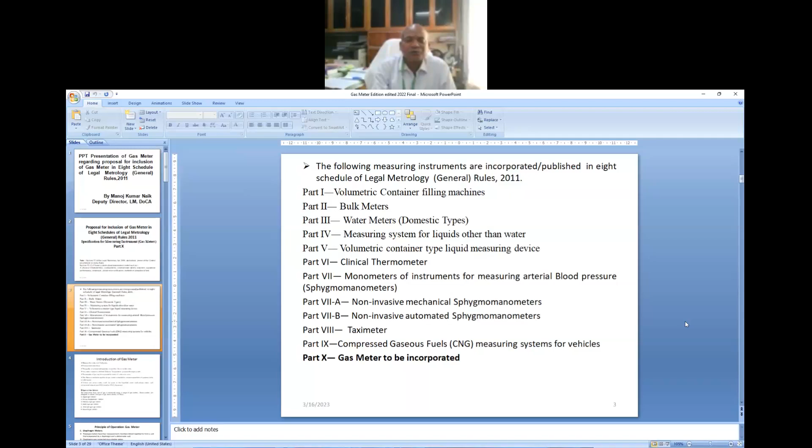It is proposed on the basis of OIML recommendation number R137, part 1 and part 2, edition 2012, and this is the proposed draft rules for the gas meter.

A gas meter is an instrument intended to measure, memorize, and display the quantity of gas passing the flow sensor. For propane and natural gas, it measures the quantity or pressurized quantity of gas that flows via the meter. Gas meters measure a defined volume at certain temperature and pressure through the meter. The quantity of gas can be expressed in units of volume or mass.

This recommendation applies to gas meters intended to measure quantities of gaseous fuels or other gases. It does not cover meters used for gas in the liquefied state, multi-phase, steam, and compressed natural gas used in CNG dispensers.

Various types of gas meters measure the volumetric flow rate of gas using a range of gas meters, including diaphragm meters, rotary displacement meters, velocity type gas meters, head type gas meters, thermal type gas meters, and acoustic gas meters. I think some of the paper presenters are from manufacturing units, and as I understand, they will elaborate on the diaphragm meter.

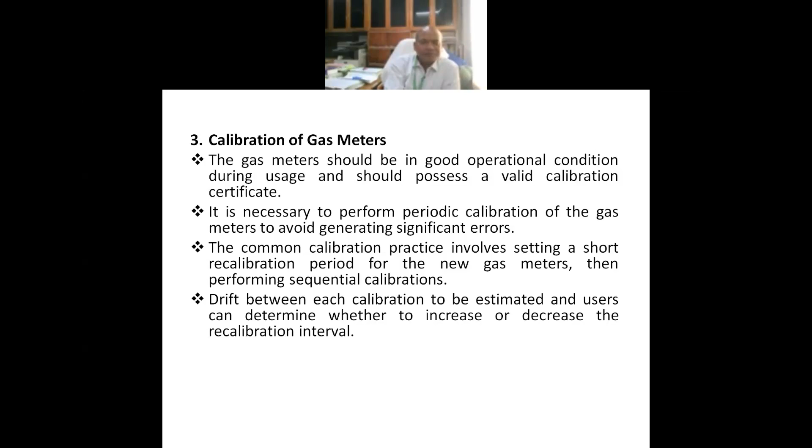Uses of gas meters: they are used in offshore and onshore drilling rigs to measure gas quantities. They can be retrofitted to existing rig flare lines to measure gas volumes. Gas meters are no exception; they must be in good operational condition and must have a valid calibration certificate. They are also used in residential, commercial, and industrial buildings that consume fuel gas supplied by a gas utility.

International practice with gas meters: the initial re-verification period for diaphragm type is 7 years proposed. For meters rated air capacity greater than 240 cubic feet per hour, that is 6.8 meter cube per hour, the initial verification period is proposed at 7 years, and the subsequent re-verification period was 6 years in international practice. After 2014, the subsequent re-verification period is reduced to 5 years.

Meters rated with air capacity less than 240 cubic feet per hour, that is 6.8 meter cube per hour, qualifying under the clause was 10 years, and initial verification was 7 years, but after 2013 it is made 6 years, and subsequent verification it is made 8 years.

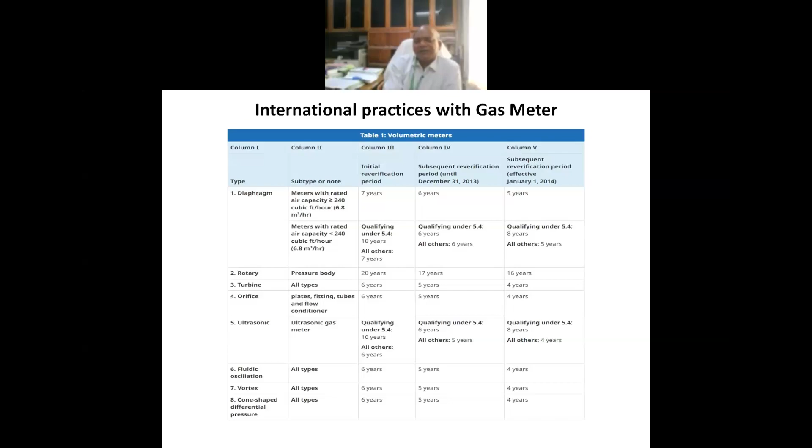Rotary type gas meters, subtype or note pressure body type, have an initial verification period of 20 years, and after 2013 it was made 17 years, and after 2014 it was made 16 years. Similarly, rotary, turbine, orifice, ultrasonic, fluidic oscillation, and vortex meters have almost all come after 2014, and the periodic re-verification period is made almost 4 years. I will show later the gas meter which was approved by the Ministry of Consumer Affairs on the basis of international recommendation only, not tested inside the country.

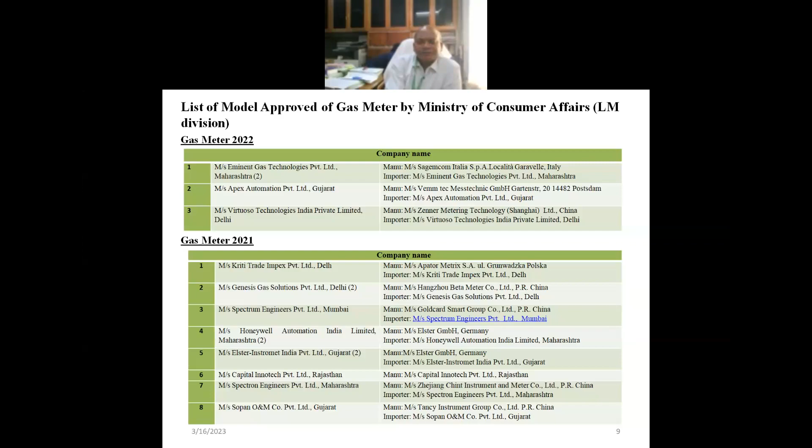In the provisions relating to approval of model in accordance with the Legal Metrology Act, under Section 22, every person before manufacturing or importing any weight or measure shall seek the approval of models of such weight or measure in such manner, on payment of such fees and from such authority as may be prescribed. Such approval of model may not be required in respect of any cast iron, brass, bullion, or carat weight or any beam scale, length measure not being a measuring tape, which are ordinarily used in retail trade for measuring textile or timber, or capacity measure not exceeding 20 liters, ordinarily used in retail trade for measuring kerosene, milk, or potable liquors. Provided further that the prescribed authority may, if satisfied that the model of any weight or measure which has been approved in a country outside India conforms to the standards established under this act, approve such model without any test or after such test as he may deem fit. This is the act under Section 22. The director is empowered for model approval.

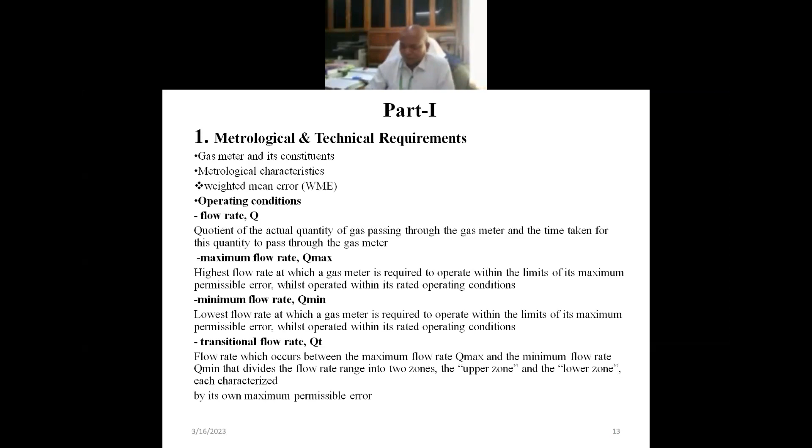In the technical specification, we have two parts. Part 1 deals with the metrological and technical requirements, and Part 2 deals with the metrological controls and performance test.

Some technical terms: flow rate is the actual quantity of gas passing through the gas meter and the time taken for that quantity to pass through the gas meter. This is flow rate Q.

Maximum flow rate, Q max, is the highest flow rate, and minimum flow rate, Q min, is the lowest. Transitional flow rate, denoted QT, is the flow rate that occurs between Q max and Q min, dividing the flow rate range into two zones, the upper zone and the lower zone, each characterized by its own maximum permissible error. So the upper zone has its own maximum permissible error, and the lower zone also has its own maximum permissible error.

Test conditions and metrological requirements include rated operating conditions and values of Q max, QT and Q min. The manufacturer of the gas meter should mention the rated operating conditions. The flow rate characteristics of a gas meter shall be defined by the values of Q max, QT and Q min, and the ratios and relations shall be within the ranges stated in table 1.

When the Q max to Q min ratio is greater than 50, the Q max to QT ratio should be greater than or equal to 10. When the Q max to Q min ratio is greater than 5 and less than 50, the Q max to QT ratio should be greater than or equal to 5.

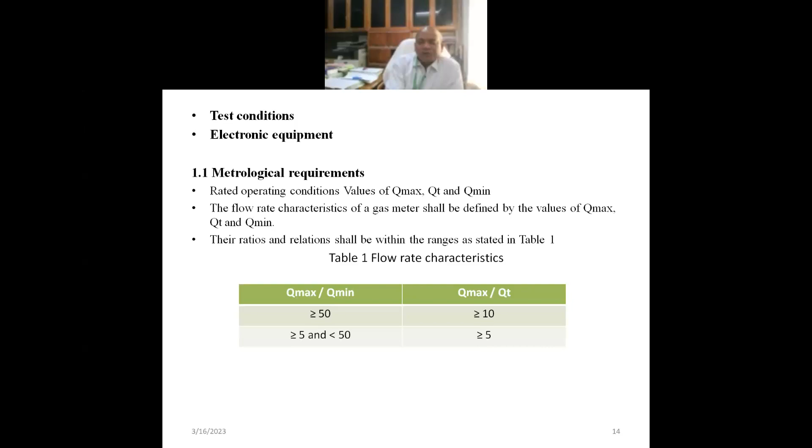Regarding accuracy class and maximum permissible errors, gas meters may be divided into three accuracy classes: 0.5, 1 and 1.5. A gas meter shall be classified according to its accuracy into one of these classes. The value of MPE is dependent on the applicable accuracy class as listed in table 2.

This is based on the flow rate Q. When Q min is less than Q is less than QT, during the type evaluation and initial verification, the maximum permissible error for accuracy class 0.5 is plus minus 1%, for accuracy class 1 it is plus minus 2%, and for accuracy class 1.5 it is plus minus 3%.

And when QT is less than or equal to flow rate Q is less than or equal to Q max, for accuracy class 0.5 the initial maximum permissible error is plus minus 0.5%, for class 1 it is plus minus 1%, and for class 1.5 it is plus minus 1.5%.

During subsequent verification and in-service use, the maximum permissible error for accuracy class 0.5 is plus minus 2%, for accuracy class 1 it is plus minus 4%, and for accuracy class 1.5 it is plus minus 6%. So in the in-service condition, the maximum permissible error is almost double that of the initial verification.

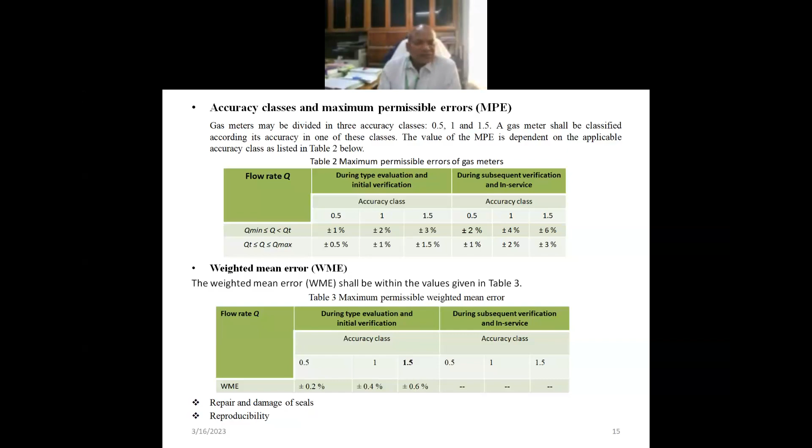Another term is weighted mean error, WME. The weighted mean error shall be within the values per table 3. For flow rate Q and accuracy class 0.5, during evaluation and initial verification, WME should be plus minus 0.2%; for class 1 accuracy it is plus minus 0.4%; and for class 1.5 accuracy it is plus minus 0.6%.

A gas meter shall meet the following requirements after being subjected to flow at a rate between 0.8 Q max and Q max, comprising a quantity equivalent to a flow at Q max during a period of 2000 hours. This is the durability condition.

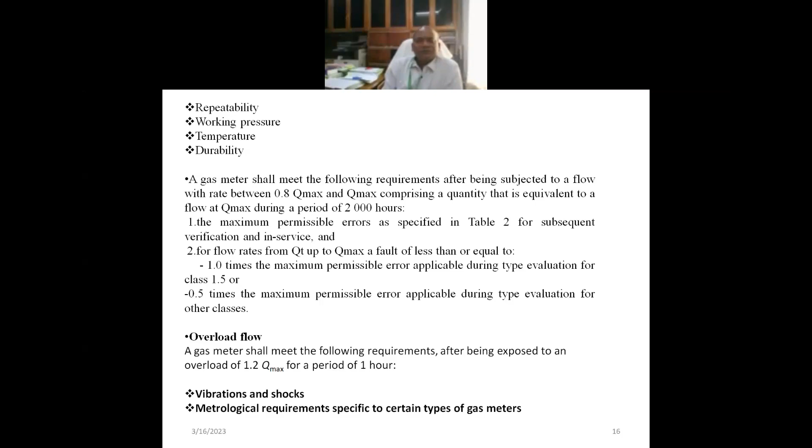For flow rates from QT up to Q max, a fault of less than or equal to 1.0 times the maximum permissible error applicable during type evaluation for class 1.5 or 0.5 is required. Part two of the technical specification covers the metrological controls and performance tests.

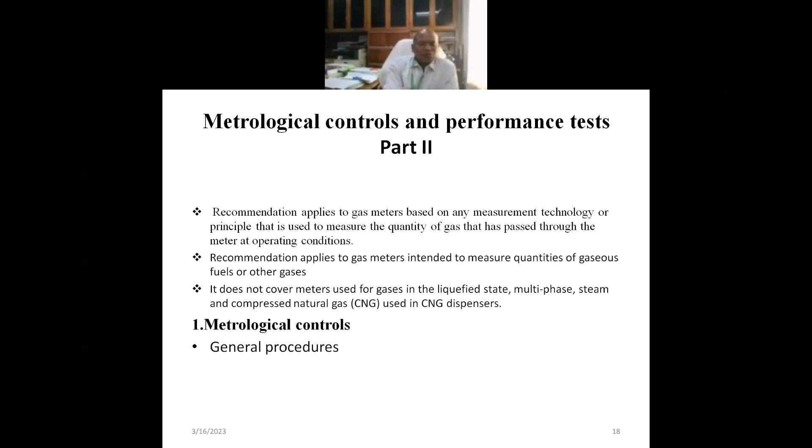This recommendation applies to gas meters based on any measurement technology or principle used to measure the quantity of gas that has passed through the meter at operating conditions. It applies to gas meters intended to measure quantities of gaseous fuels or other gases. It does not cover meters used for gases in the liquefied state, multi-phase, steam, and compressed natural gas used in CNG dispensers. Metrological controls general procedure is detailed elsewhere.

I will not cover all of that; instead I will talk about some of the performance tests, starting with the dry static temperature test.

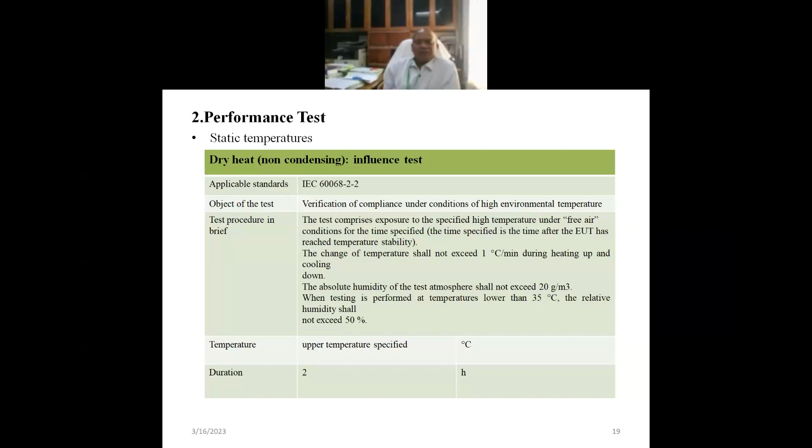The applicable standard is IEC 60068-2-2, and the object of the test is verification of compliance under conditions of high environmental temperature. In brief, the test comprises exposure to the specified high temperature under free air conditions for the time specified, which is the time after the unit under test has reached temperature stability. The change of temperature shall not exceed 1 degree centigrade per minute during heating up and cooling down. The absolute humidity of the test atmosphere shall not exceed 20 grams per cubic meter. When testing is performed at a temperature lower than 35 degrees centigrade, the relative humidity shall not exceed 50%. The temperature upper limit is specified in degrees centigrade, with a duration of 2 hours.

In cold influence test, the applicable standard is IEC 60068-2-1, and the object of test is verification of compliance under conditions of low environmental temperature. The test procedure in brief comprises exposure to the specified low temperature under free air conditions for the time specified, meaning the time after the EUT has reached maximum temperature stability.

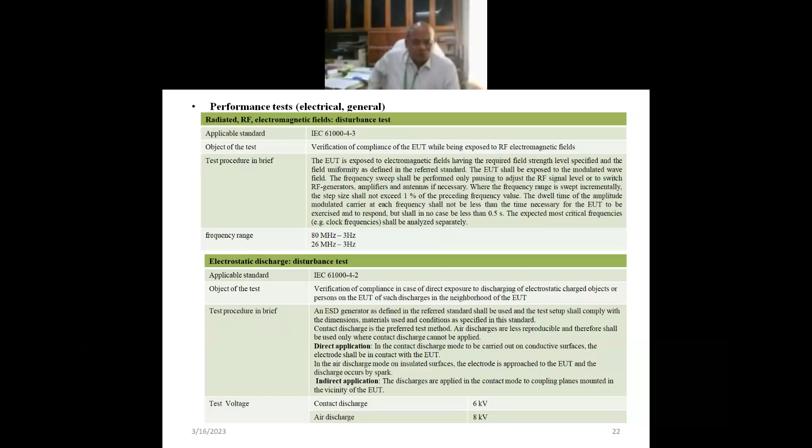For offenses and penalties, Section 25 of the Act specifies the penalty for use of non-standard weight or measure. The first offense is a fine up to 25,000, and for subsequent offense, imprisonment for a term which may extend to 6 months, and also with fine.

Penalty for manufacture or sale of non-standard weight or measure: first offense is a fine up to 25,000, and for second or subsequent offense, imprisonment for a term which may extend to 3 years, or fine, or both.

Penalty for transaction in contravention of standard weight or measure is 10,000 rupees. And penalty for use of unverified weight or measure is not less than 2,000, which may extend to 10,000 rupees. Thank you, sir.

Thank you very much, sir, for your insights into the draft regulations for gas meters in India. You have very clearly explained the provisions relating to the approval of model as per the Legal Metrology Act 2009, Section 22. You have also clearly explained the maximum permissible error requirements and various performance tests for the meters, and also the penalties related to misuse.

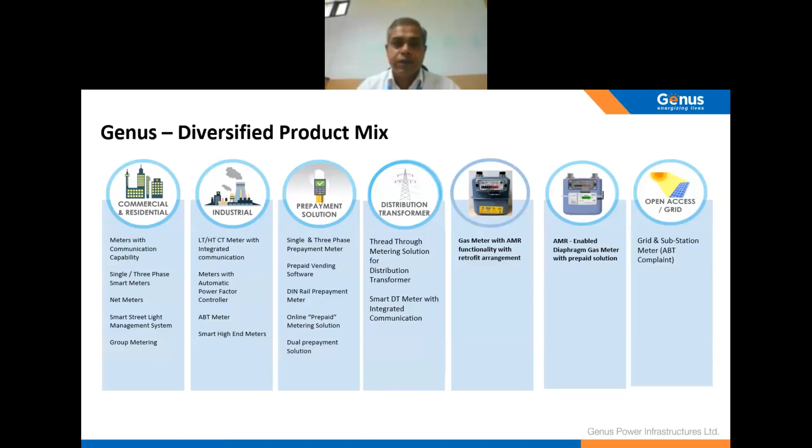We are present in almost 18 countries, mainly African and Middle East countries, including Singapore. We are present in almost all the utilities in India, basically electrical utilities, and currently we are serving most of the gas utilities, the CGDs in India as well, with our domestic meters.

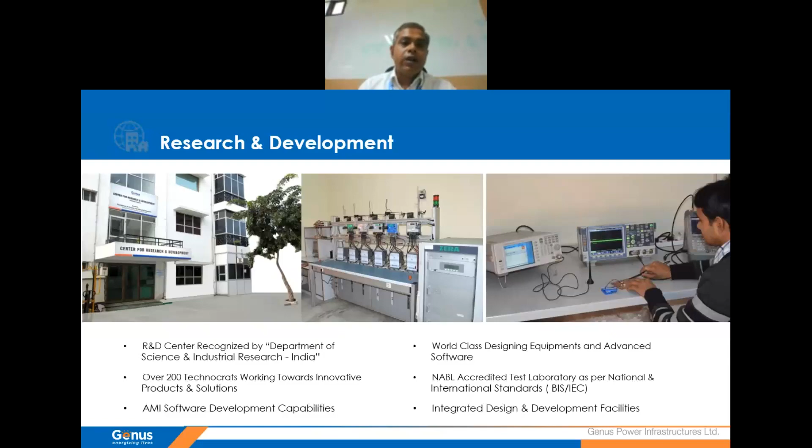The rest basically belongs to our electricity meter manufacturing. This is about our research and development. We have R&D recognized by the Department of Science and Industrial Research of India. Over 200 technocrats are working here. We have a NABL accredited lab that is BIS and IEC certified, along with integrated design and development facilities.

This is our infrastructure facility of fully automated SMT lines, belonging to the electricity meters. It's a fully automated metering line. We manufacture this in various parts of India like Jaipur and Haridwar.

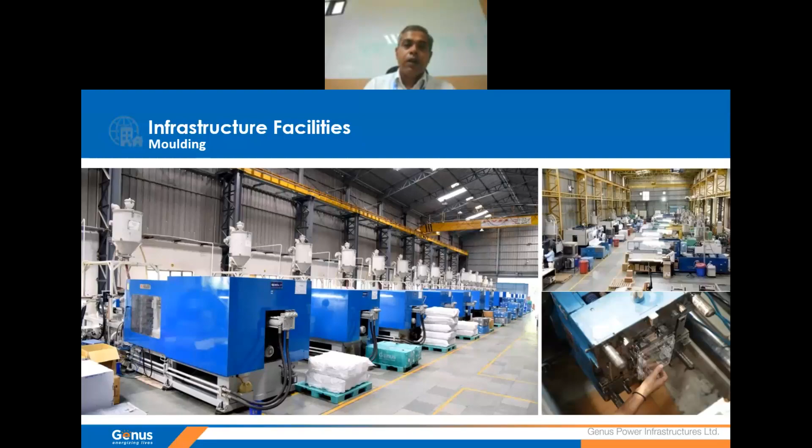We also have our in-house facility for injection molding. So any plastic equipment, mostly we are manufacturing all the plastic equipment of electricity meters and gas meters in-house as well, to ensure the quality of the product for measuring units and all. This is the tool room, where tooling is also done by Genus in-house.

This is about the gas journey so far for Genus. We have the most important certificates as of now in domestic gas meters: MID, Module B, Module D, and BIS certificate. I'll explain later why this is important. We have delivered more than 150K gas meters to various cities in India.

We have also already delivered smart AMR postpaid meters. Production capacity currently is 30,000, and based on the requirement, we can increase anytime. We have our in-house AMR solutions also, that is meter interface unit, MIU. And as I told earlier, prepayment smart meters with dual communication and all is under development, and we will release this by this year end.

One important point I'd like to highlight, since this is a common forum and everybody should know this: we have a strategic tie-up with Itron, or right now Dresser. You all know about Itron, one of the market leaders in gas metering, a company based in the US. Unfortunately, they are discontinuing from India, and that metering section—especially commercial and industrial metering like turbines, RPD, regulators, valves, EVCs—all were acquired by a company called Dresser. This is also a meter manufacturing company, but focused basically on North America, an American company. Now they have acquired the German facility of Itron, and Itron now becomes Dresser.

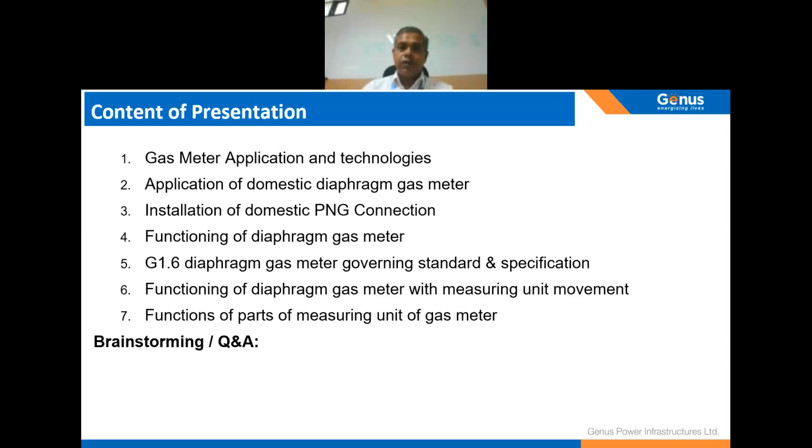So first, what is the purpose of a gas meter? A gas meter is a specialized flow meter used to measure the volume of gases such as natural gas and liquefied petroleum gas. Gas meters are used in residential, commercial, and industrial buildings. Accurate gas meter or liquid flow measurement ensures safe, efficient, and environmentally compliant operation in measured applications.

Gas is basically an inflammable thing, so all gas segments are divided into zones: zone 0, zone 1, and zone 2. Zone 0 is the highly inflammable one, zone 2 is the lowest one, and so on. Meters are normally coming under the zone 2 facility, to ensure that accidents don't happen, so we segregate this into zones.

Now there are many types of gas meters: domestic to cater to the entire market, commercial, industrial, and custody transfer. There are many more types of meters, but today I am focusing on the main meters in the industry that are most in use.

The first section is positive displacement. Under positive displacement, obviously our topic of today, diaphragm meters, comes under this, and rotary meters also come under this. Rotary meters are basically known as RPD meters also, that is rotary positive displacement. We can have a separate presentation on this because it's a different league of meters. So we are focusing on diaphragm meters for today.

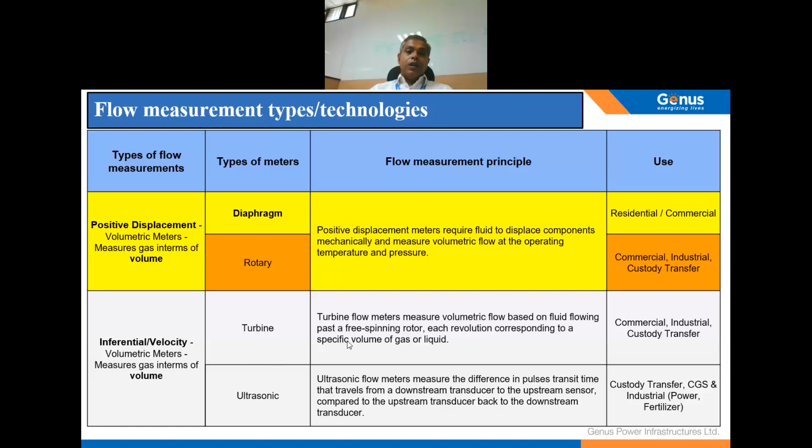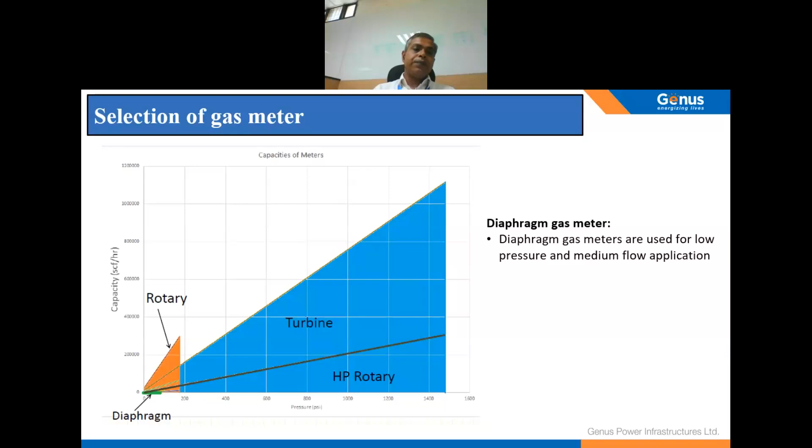One of the main reasons we go with domestic meters, diaphragm meters, for the domestic section or maybe a few commercial sections as well, is because of the rate. Rotary meters are costly, so you cannot afford to have rotary meters in the domestic section because of the ROI issue. So this is one of the important reasons why we go with diaphragm meters for the domestic section.

What is a diaphragm gas meter? I'm focusing on the G1.6 meter, which is the residential meter. A diaphragm gas meter is a positive displacement flow meter used to measure the volume of gas consumption at low pressure, so the utility can bill for it. It's a specialized flow meter that can measure the volume of gases like LPG, low pressure piped natural gas, etc. It can be used for domestic and commercial purposes.

These are the basic certifications required to sell gas meters in India. This is the main guideline to participate in a tender, the main criteria. As of now, the mandatory certificate is EN 1359, the governing standard, and the issuance authority is MID. In MID there are two sections: product and factory. Product MID is known as Module B, and factory related certificate is known as Module D. These are the most important certificates needed to quote any tender or supply meters to the utility.

Test labs - the most important two labs as of now, maybe a few more, but I have listed down two: FCRI Palakkad, Kerala, and Yadav Measurement, Udaipur.

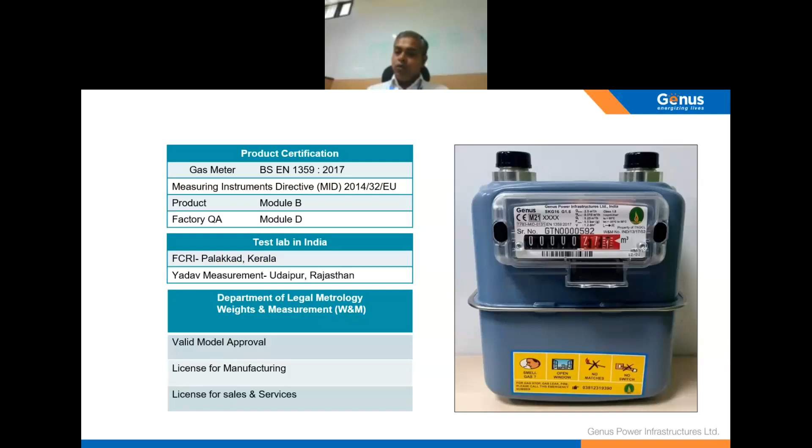For testing of module B and all, one of the major certifications is the durability test. That durability test checks up to a certain number of lakhs of cycles of the meter without stopping it, so that it can check the durability of the meter. This kind of timeframe everybody has to maintain before launching their gas meters in India.

This is the normal structure, just to give an idea of where the meter is placed. Before the oven, the meter is connected with the GI pipeline, and for safety reasons we have an isolation valve and a regulator. That regulator ensures the meter operates within a range of 21 millibar, so to maintain that pressure capacity, a regulator is needed. After that, the gas goes to the meter, and from the meter it directly goes to the appliance, through appliance valves to the oven for kitchen purposes. This gives a greater idea of how the placement of meters happens.

This is about the normal basic parameters of a gas meter. One, of course, is that EN 1359 is the main standard, the European standard, and our BIS 14439 is also there, which is under reformation. I think it already exists, but some reformation is going on.

Now coming to the technical parameters, one of the most important is cyclic volume. As earlier Nayak sir told, there are different types of cyclic volumes. I have mentioned 1.2 liter, 1 liter, 0.8, and 0.6, and given a bold mark on 1.2 — I'll come to why I mentioned that. Cyclic volume is the volume of gas passed by one rotation of the gas meter measuring unit, and is 4 times the volume of the diaphragm.

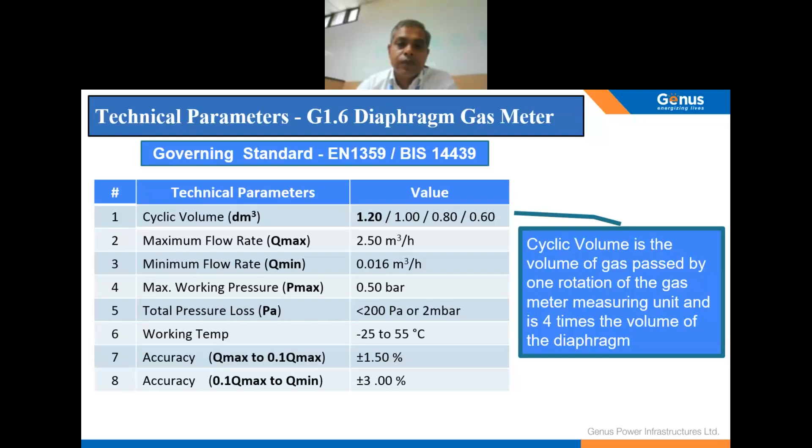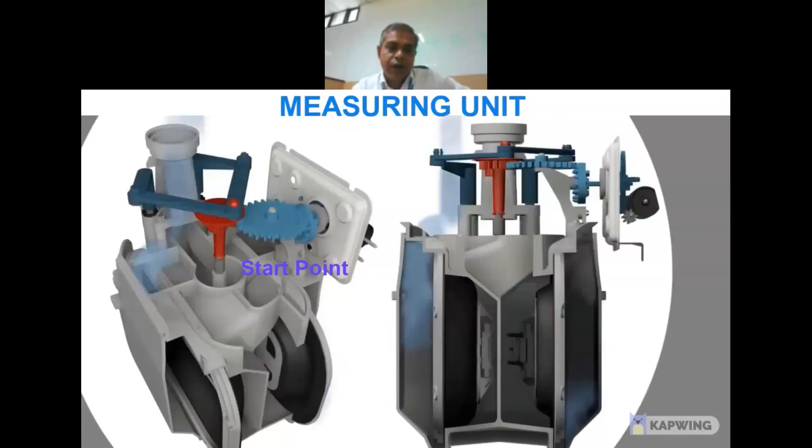So I arranged this video — you can see how the gas is going inside and coming out. This is 1.2 liter rotation, meaning one cycle. I'll play this once more. You can see the gas going from one chamber, expanding the diaphragm, then going to the next level and getting compressed. Once compressed, it goes to the next outlet chamber from inlet to outlet. Again it expands and compresses — that's why it's called four rounds of diaphragm compression and expansion, so that it creates one cyclic volume.

Different manufacturers follow different sizes of cyclic volume — 1.2, 0.6 liter and so on — depending on the structure of the measuring unit. The less the cyclic volume is, the smaller the measurement counter size gets, because the diaphragm size also gets smaller. You can see once more, it's going from inside, then that side, coming out, rotating, and the gears and crankshafts are rotating accordingly, creating that one unit.

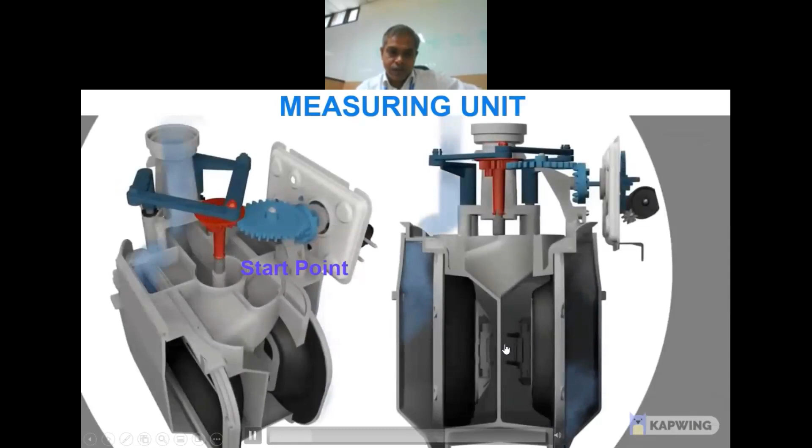So here we've done a small exercise to understand cyclic volume better. We've given four types of cyclic volume in liters: 1.2, 1, 0.8, and 0.6. If we pass 10 liters of gas or air, to measure this 10 liters, a 1.2 liter cyclic volume will get 8.33 rotations, whereas for 1 liter it's 10, for 0.8 it's 12.5, and for 0.6 it's 16.67.

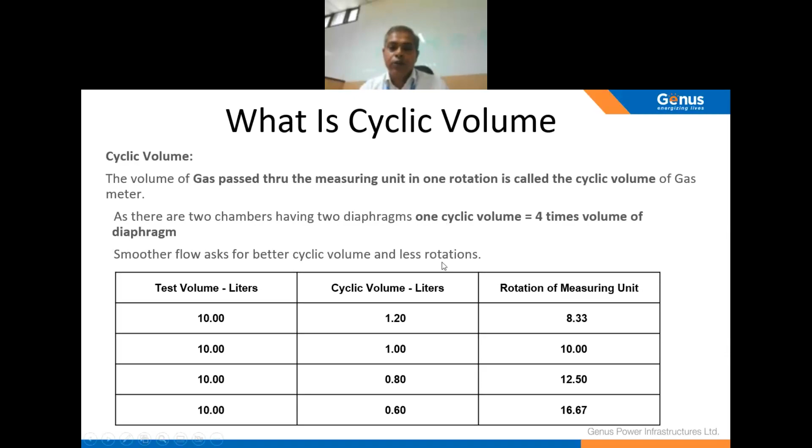So you can derive from here that the more liters the cyclic volume is, the less the rotation is — meaning wear and tear will be less for any meter. You can get a similar kind of measuring unit and measuring calculation for this part. Per unit will be the same for every cyclic volume, but working capacity will increase as you decrease the cyclic volume. That's why, as our co-host already told, 1.2 is a better choice.

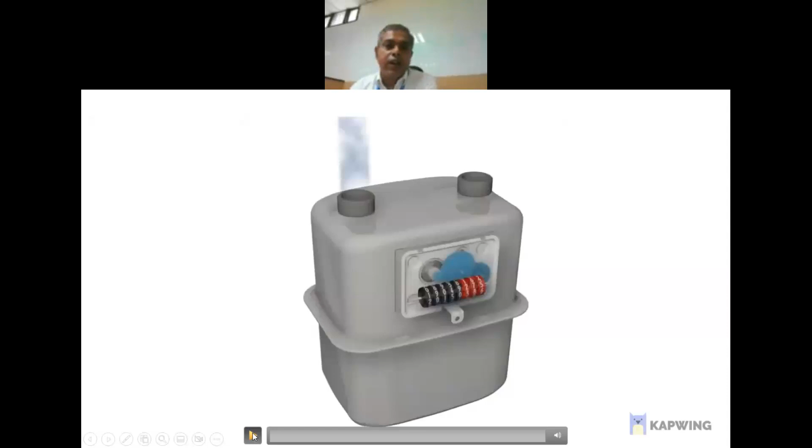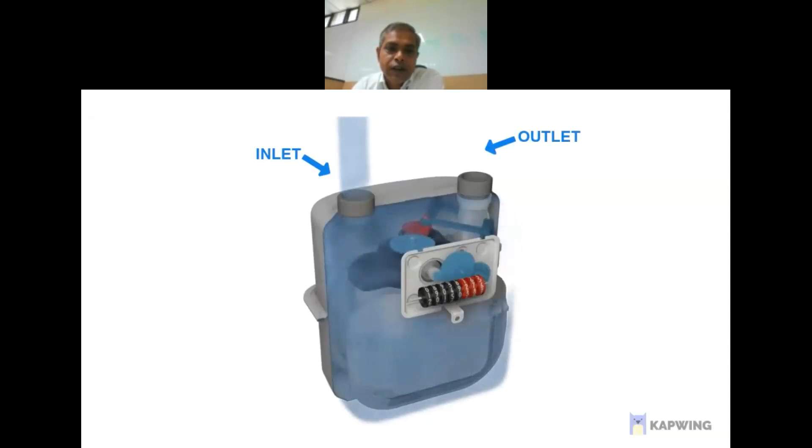This is another video showing the functionality of the gas meter in a better way. The gas goes inside through the inlet, and this is the outside casing. The measuring unit inside measures the gas as it comes out. The crankshaft rotates accordingly, which rotates the pinion gears, and these gears are connected with the measuring counter, which also rotates.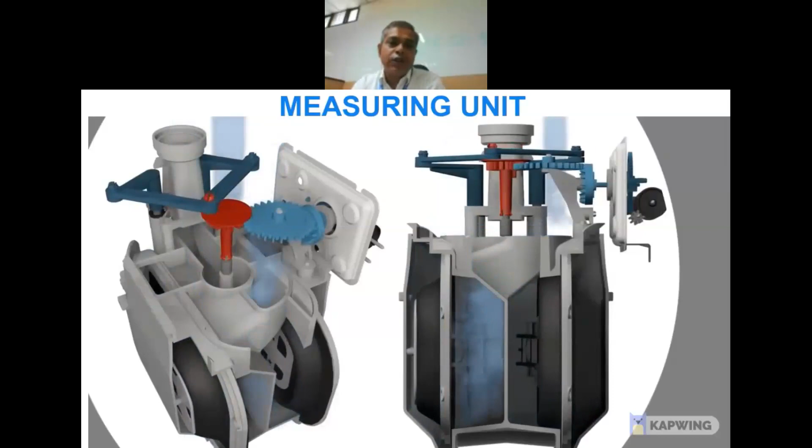So this is the inside mechanism we follow for this. The gas goes in and out, and the diaphragm undergoes two types of motion, compression and expansion, and accordingly you measure the gas. I hope this gives a basic idea of the functionality of gas meters.

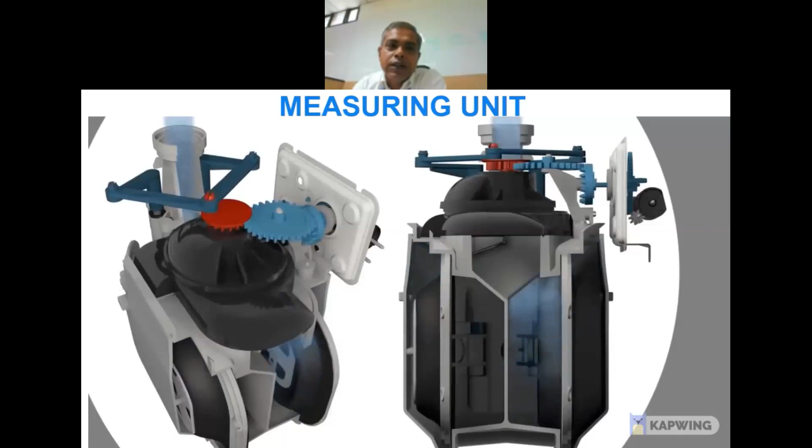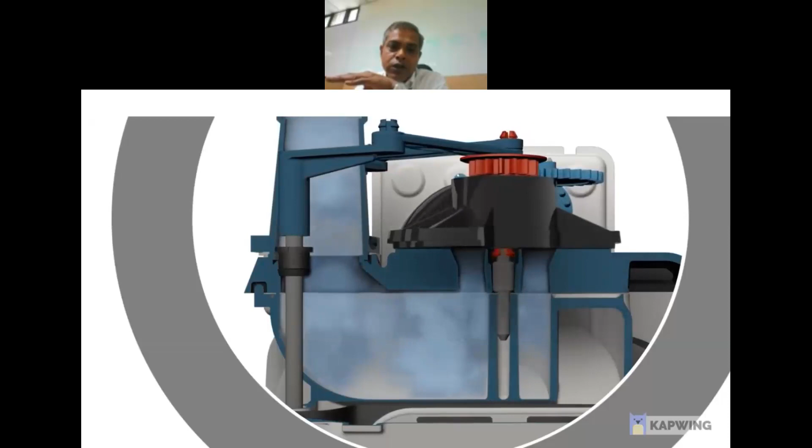Once this gas goes in and out, that means one cyclic volume is completed. Now coming to how this rotation happens: the inlet and outlet open and close in turn. Once the inlet is open, the outlet is closed, and once the inlet is closed, the outlet opens.

So the gas transfers from one chamber to another one by one, not simultaneously. For this we have this video. This is the mechanical part, a purely mechanical thing, so all these gears rotate accordingly. This point is the main connection from the inlet to the outlet, and this gear moves accordingly. These two gears move, and the counter rotates accordingly.

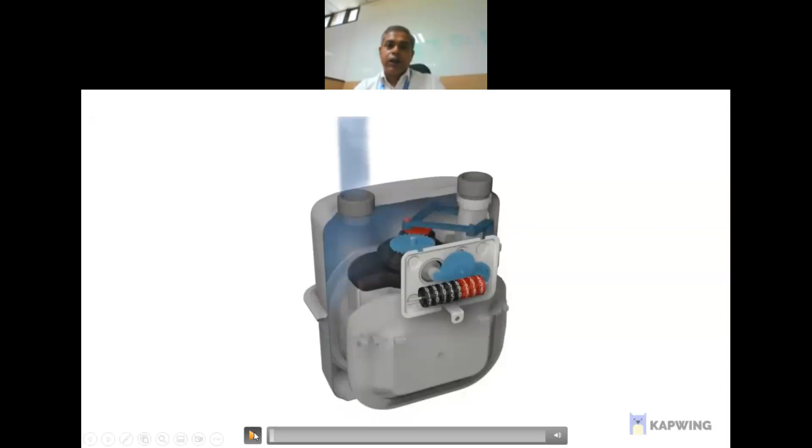Kaushik sir, please conclude. Yeah, I don't know, it's getting some issue going to the next slide, it's a problem for me. Second... gone, right? Yes.

This is the coupling. In my last slide I showed how this communication happens. Couplings are of two types: one is magnetic coupling, one is mechanical coupling. In mechanical coupling, it's a completely mechanical thing, so it needs very high precision. But the advantage is that it's purely tamper proof, because there is no use of any magnet or similar mechanism.

But in inductive coupling, a magnet is in use, so by induction this rotation moves. The advantage is that we don't need any holes or similar openings in the body of the casing. But here we also have to be very precise, it will follow the IP rule as well, and the counter will move as well.

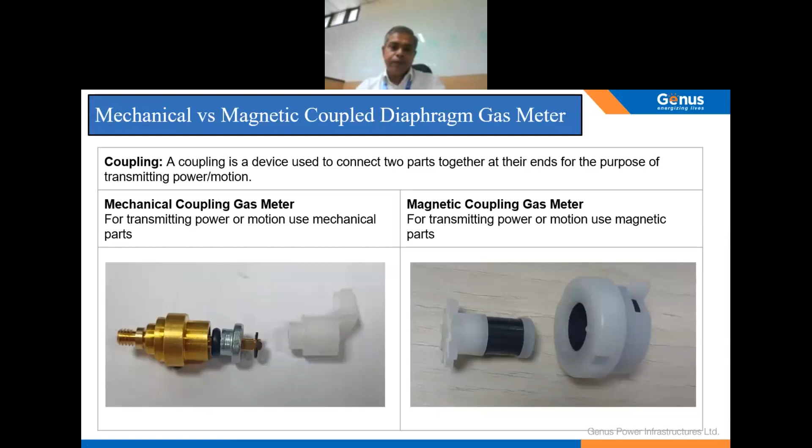So we did a small test here: if you place a 0.5 Tesla magnet, or maybe 0.2 Tesla, over the main part of the counter, and if the rotating factor is magnetic, the meter will get slow. If it's a mechanical kind of coupling, it will not slow down, because there's no use of a magnet. So it's always better to go for mechanical coupling.

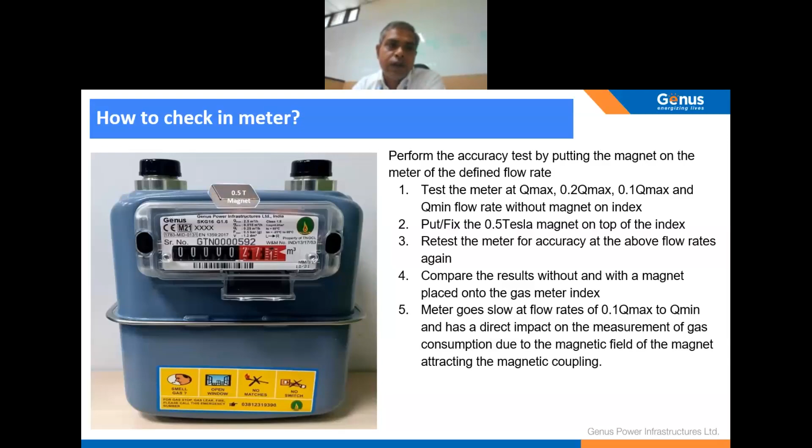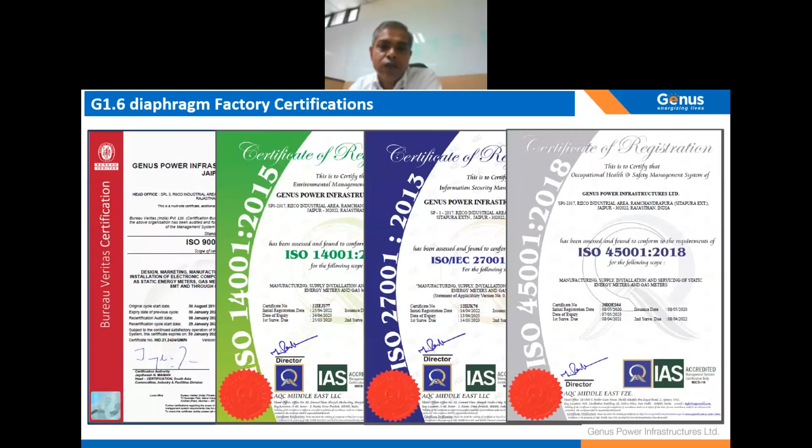That's all from my side, I hope I've given a brief knowledge on the functionality of diaphragm meters. Thank you from my side, and thank you everyone for listening. If you have any questions, please contact Kundan sir, he will take those answers. Thank you, thank you Kaushik sir.

You have very beautifully explained the working of the diaphragm gas meters, the issues related to cyclic volume and magnetic susceptibility. You have also explained the types, selection, and uses of gas meters and their advantages in terms of ROI. So I thank you for your insight into this.

Some members want to discuss regarding cyclic volume. We will have a discussion session where I would invite some of the attendees also to discuss with the panel experts. In the end, I will take one question: What is the significance of transient flow rate QT in gas meters?

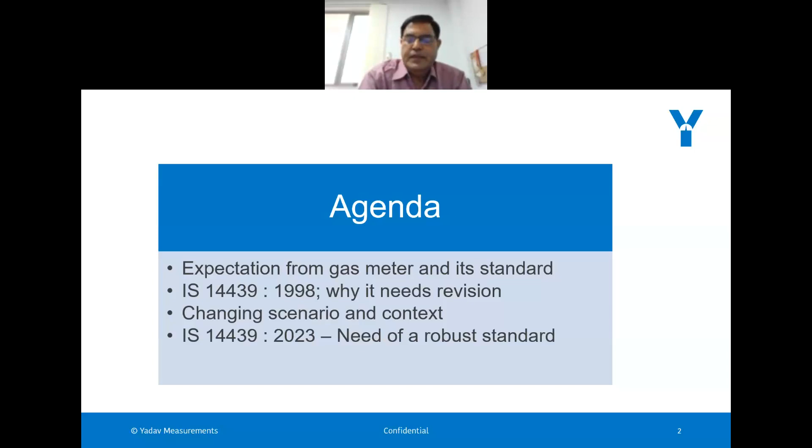Before doing that, just a brief introduction of my organization, Yadav Measurements. We are an NABL and UKAS accredited test and calibration laboratory. NABL, most of you know, is an apex body for accrediting test and calibration laboratories in our country, and UKAS is United Kingdom Accreditation Service. We are the only accredited laboratory by UKAS for electricity meters, gas meters, and various test facilities, and of course we are a BIS recognized laboratory for electricity meters and gas meters as per Indian standards.

As far as I know, to the best of my knowledge, we are the only recognized laboratory by Bureau of Indian Standards for IS 14439. We are also recognized by various electricity regulators. We are based in Udaipur.

Of course, we have a lot of test facilities for electricity meters, but I will not talk about those things. We have EMI/EMC test facilities, environmental test facilities, climatic, mechanical, and all those things. But here, for the benefit of all attendees, I would like to talk about our extensive test facilities for calibration and testing of gas meters. We can test for accuracy meters from G1.6 to G1600. I will show you some of the test facilities.

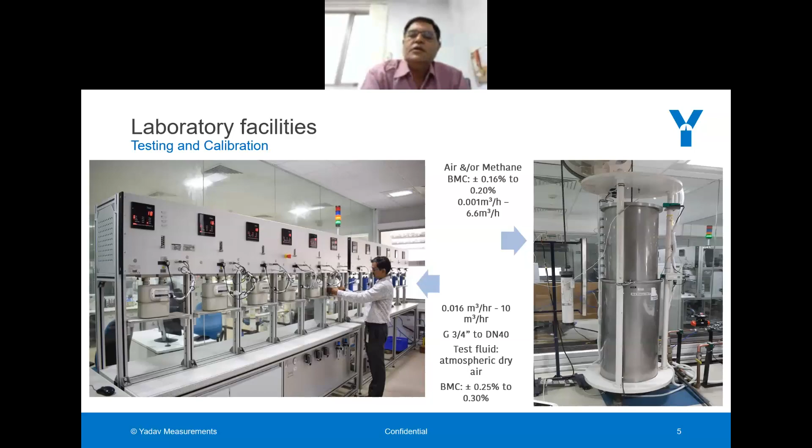These are some of our facilities. The test bench on the left hand side is basically a test bench up to G1.6 to G6. On the right hand side is the primary standard for volume measurement, which is the Bell prover. We have one of the best CMCs, with an uncertainty of 0.16 to 0.2% for the Bell prover. We also have another test bench which can test meters up to G1600, meaning you can test the accuracy of meters up to 2500 meter cube per hour with an accuracy of plus minus 0.2 to 0.3%. One of the best facilities we have in India.

I would also like to add that we are the exclusive partner of Itron, now known as Dresser, for repair and calibration of gas meters in India.

So with this background, I would like to move to the original subject of gas meter standards. I will start with what different stakeholders actually expect, because the standard should meet the expectations of all stakeholders, be it manufacturers, CGDs, users, regulators, or consumer forums. So what do people expect, what do stakeholders expect from gas meters?

The first thing is it should be reliable and robust under various stresses. The gas meter has to work continuously, unattended, 24 hours, because gas can be used by the user anytime. So it should always be working 24 hours unattended, and mostly people will expect it to work without any problem for at least 10 years.

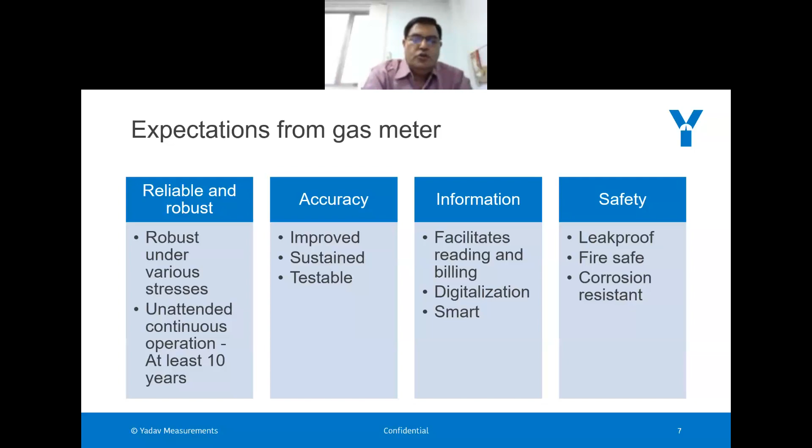So with this background of expectations from different stakeholders, we are making new standards. The standard should support mass manufacturing, not prohibit it. It should support mass installation, which should be easy and standardized. It should meet requirements of reliability, safety, sustained accuracy, easy reading and billing, and easy installation.

It should be suitable for the Indian environment. This is very important because India has a wide range of climatic conditions. From Jammu Kashmir to Tamil Nadu, east to west and north to south, we have different climatic environments, and our standard is applicable all over.

As we were talking about digitalization, the standard should be unambiguous. Many times we find ambiguous requirements given in standards, so we should try to ensure variability is minimized and interpretation is clear. Testing and certification methods should be well defined, acceptance criteria should be well defined, and type test, acceptance test and routine test should be part of the standard.

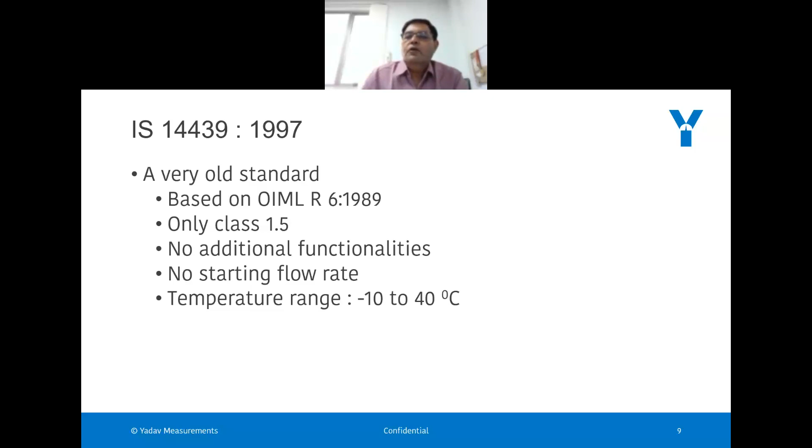Now, what is the changing scenario? As I told you, information and communication technology is required nowadays in all aspects of life. The testing methods have changed since 1997-98. A lot of testing methods have improved in terms of repeatability, measurement techniques, and accuracies. So new testing methods have come up, and we need to incorporate all these in our upcoming standard.

It should support mass scale manufacturing and installations, and it should meet regulatory requirements like PNGRB or any other regulations.

What does industry expect? Industry expects easy integration with information technology infrastructure, better accuracy and robustness. CGD wants the meter to be as accurate as possible, working for a long duration, at least 10 years, with quick reading and billing so that finances are quickly recovered. At present we are doing postpaid billing, meaning the CGD gets the money after supplying the gas, maybe after 2 months. So today if I am using gas, I will pay after one, two or three months. And of course, the meter should be economic.

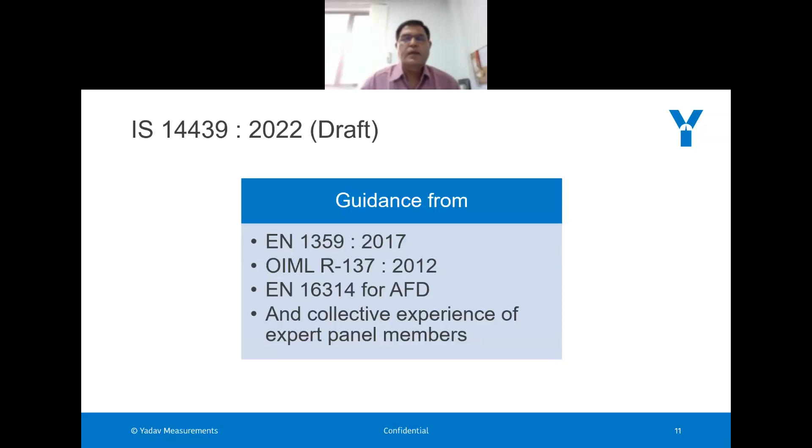I will give a brief on the new requirements as compared to the existing IS 14439. We are adding starting flow rate. I've interacted with a few CGDs and they complained that existing meters, when used at very low flow rate, are not recording the volume - the consumer is using gas, but the meter isn't recording it. So starting flow rate should be required. Once you define the starting flow rate, the meter design will be required to measure some minimum flow rate. That's one of the requirements we're adding.

We are adding influences of other devices - the meter will have a lot of additional functionalities, and we need to define how they can influence the performance of the meter. Resistance to high ambient temperature is needed because sometimes there can be a fire in the building or home. Even in that case, the meter should not leak, it should not aid the fire. So that is the requirement - resistance to heat and high ambient temperature is proposed to be added.

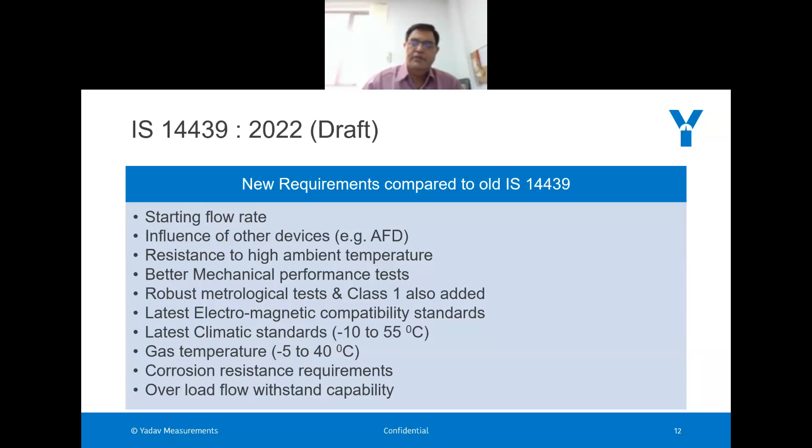Corrosion is very important for the gas meter, because corrosion can make the meter unsafe. So there are lots of corrosion resistance requirements we are adding, and also we are adding overload flow withstand capability. Sometimes if the meter faces a flow rate more than Qmax, the meter should not get damaged, and it should work correctly when the flow rate returns to normal.

Coming to the corrosion resistance requirement, we are adding scratch resistance of the protective coating, adhesion of the protective coating - how strong the adhesion is, impact resistance of the protective coating, chemical resistance of the protective coating, resistance to salt spray, resistance to humidity, and resistance to storage temperature. All these requirements are proposed to be added to the standard, so that the meter has very good internal and external resistance to corrosion.

As far as mechanical requirements are concerned, we are adding robustness of the meter case, which is very important. The meter case should be very safe - there should not be any leak. So external leak tightness test, resistance to internal pressure, and sealing requirements are being added.

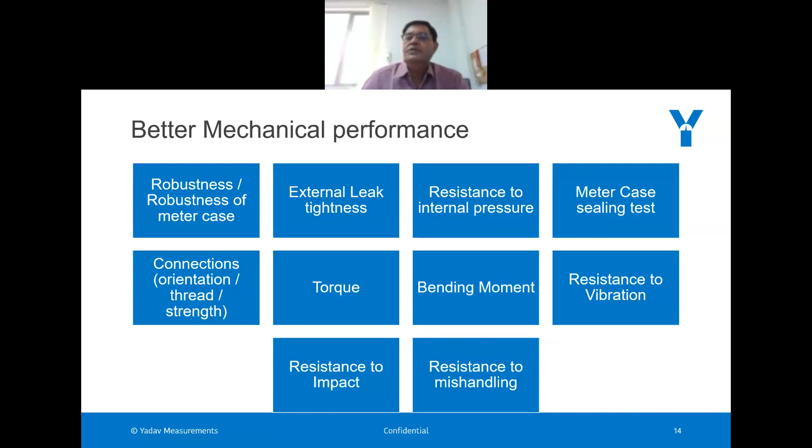Also, there are requirements related to the connections, because sometimes there can be a leak from the connections. So tests for the connections are being added in terms of thread strength, torque, bending moment, and of course resistance to vibration, resistance to impact, and resistance to mishandling, which is basically a drop test.

As I mentioned earlier, we are adding a requirement named additional functionality requirement, and this will support integration with digitalization and make the meter smart. There are three types of additional functionalities defined, called AFD1, AFD2, and AFD3. AFD1 is basically the additional functionalities that are an integrated part of the gas meter. AFD2 is additional functionalities attached to the gas meter that can be removed, but are part of or integrated along with the gas meter, and they can be separately identified.

AFD3 is a type of additional functionality where there are two different blocks, two different identities of the additional functionalities. These additional functionality requirements will support prepayment functions, which will be very useful for the consumer and for the CGD as well.

It will support software security and firmware upgrades. If this is a smart gas meter, it will support tariff management and battery management. It also requires a shut-off valve specifically for the prepayment function, which can be shut off or on depending on whether payment is pending from the consumer, so the valve performance becomes very important. So this is about additional functionalities.

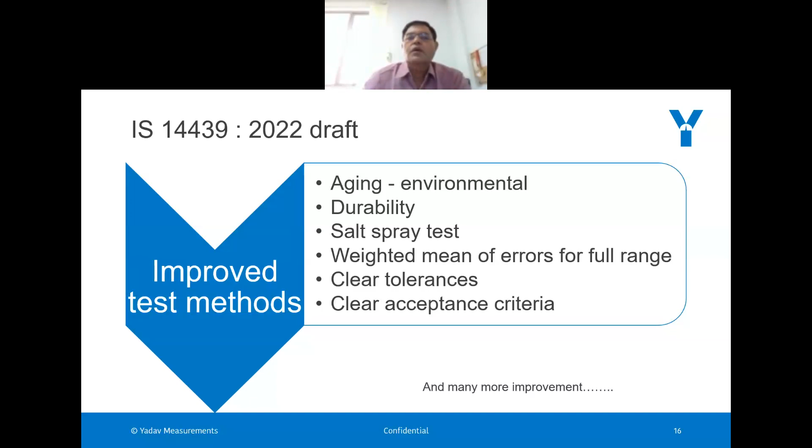And of course, there are many more improvements compared to IS 14439:1997. So this is what we expect from all of you, those who are members of PGD 26 and those who are not. We want you all to go through this draft standard, which I'm sure will be circulated by the Bureau of Indian Standards, and provide all your comments. On behalf of BIS, I will mention that all your comments will be duly deliberated by the committee and considered for the improvement of the standard. What we want is for the standard we are making to be one of the best in the world, and for the standard published by the Bureau of Indian Standards to be used not only in our country but by other countries as well.

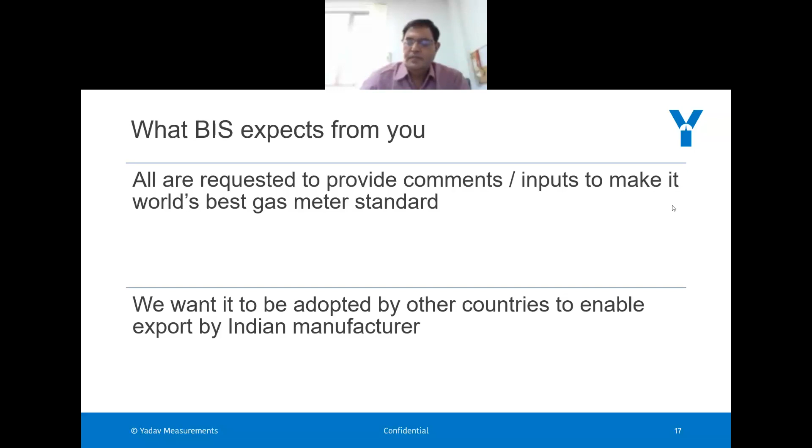Which will enable not only Make in India but also enable export by Indian manufacturers. So thank you very much, and I'm sure we will be able to publish a very good standard. Thank you.

Thank you very much, sir. You have very beautifully summed up the changes we are incorporating in the new version of the current standard. You have explained the expectations of the stakeholders from BIS as well as the expectations of BIS from the stakeholders. So what I wanted to tell all the stakeholders, you have already included in your slide. Thank you very much for that, and surely we will be able to reduce the shortcomings of the previous standard and publish a much better standard. So with that, I thank you for your presentation, and let's see if we can take some questions at this point of time.

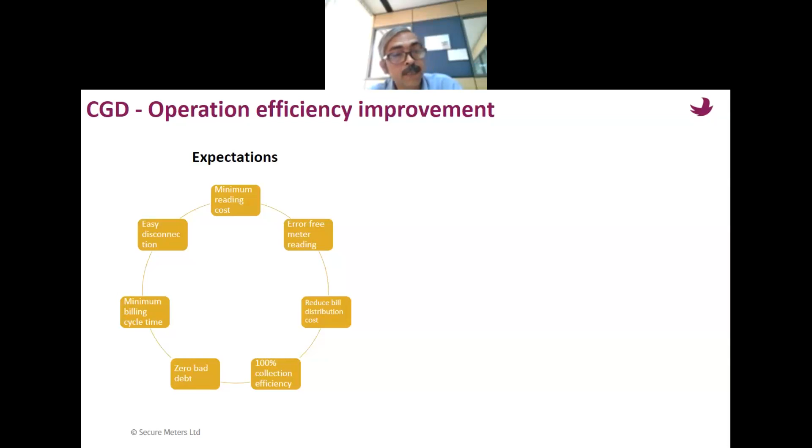A couple of years back, when PNGRB came out with an update on the gas metering regulation, these points were added - advanced collection and old dues recovery, they added a prepayment mode, and support of auto disconnection, they added a valve into the meter, which is supported in the new regulation now.

At the same time, the operational efficiency does improve if the consumer is continuously updated on his consumption. It should not happen that suddenly he gets a shock on a later date.

Next, low cost to serve. Here the expectation of the CGD is lifetime cost against L1 cost. Typically buying practices are on L1, but how long that meter is going to be in circuit, what is its reliability etc., needs to be taken into consideration, and its lifetime needs to be calculated.

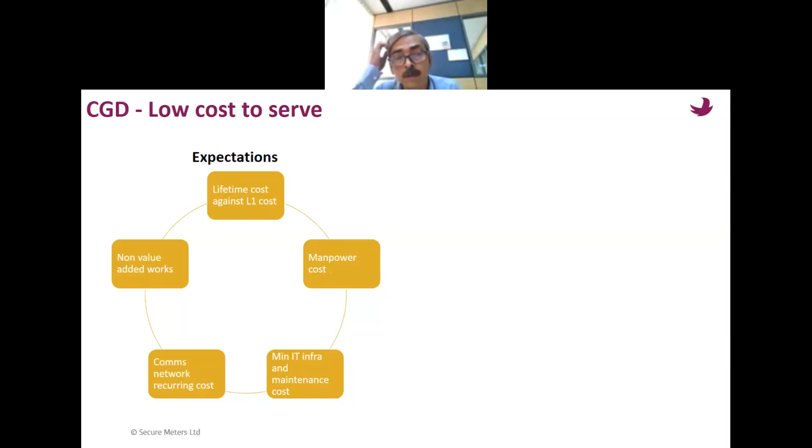The meter should have self-sufficiency, as was also being said, going towards digitization and intelligence. The meter should have intelligence to calculate and support various tariffs and other things, and of course long warranty period, since I'm relating it to lifetime cost against L1 cost. The actual manpower being utilized for metering, billing, collection, bill distribution etc. can be deployed for more useful work like network growth and maintenance. That's where CGDs can really focus on as on date, and of course you need pretty low recurring communication costs.

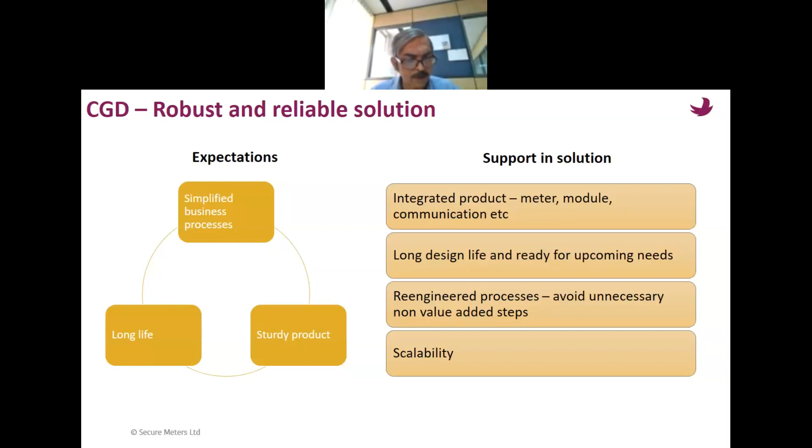So that's one part of the thing. And then those 3 slides were basically on what is the expectation of the CGD.

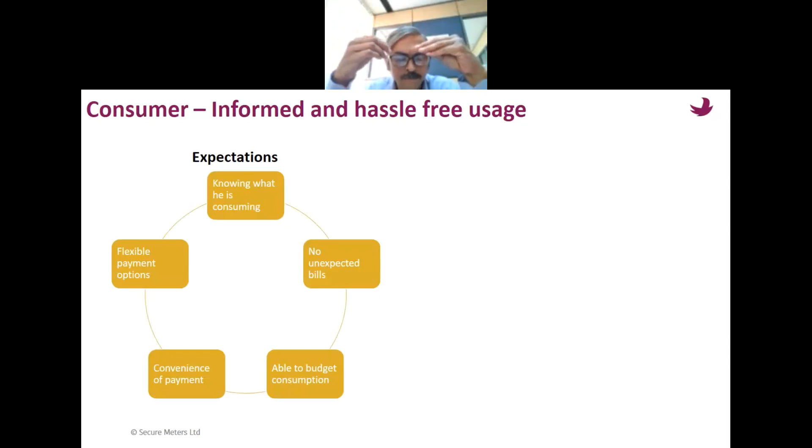Now there are certain expectations from the product which is installed on the wall from the consumer side as well. The consumer should - basically, if the consumer has a connect with something which is measuring how much money he has to pay, he will not get a jolt later on. Consumer doesn't understand SCM, but he understands what is money, what is rupees. And if he is able to get some kind of continuous feedback...

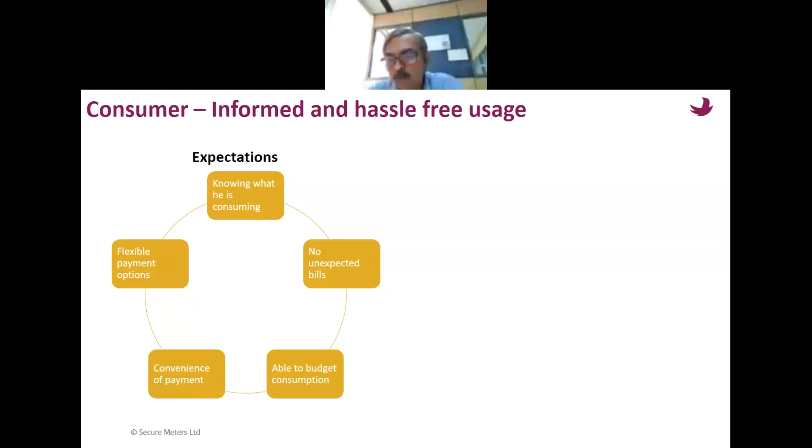...either from not getting into communication or that part of the thing, if there is a mechanism for the consumer, either directly from the meter, or maybe some kind of mobile device, or maybe from the backend, if he is getting some kind of an update, so that is something which is going to help the consumer as well. Monetary information, some kind of alarm usage, maybe various kinds of payment options, various kinds of flexible recharges. So all these things need to be supported. Ideally, these should be supported and looked forward to by the CGDs for times to come tomorrow.

There are certain things I would go into, and as of now, primarily, since the topic over here is domestic metering, the technologies that are available - if we just look at electricity meters - are measurement technologies like CT, whether shunt or Hall effect sensors, or air core transformers, etc.

So here also, metering technologies in gas metering are also available, different types: diaphragm, ultrasonic, thermal mass flow, etc. The end objective should be low cost, long life, and future ready. All the different technologies have their advantages and disadvantages - I'm not getting into them.

Diaphragm is a time-tested, proven design. Ultrasonic is something which can be used over a long range and over high temperature. Thermal mass does not require any temperature or pressure compensation, and blending of hydrogen is possible - it supports that. So all these things may have their unique advantages. At the same time, the whole thing needs to be thought through. The advantages and disadvantages of different products, maybe different technologies, may be different.

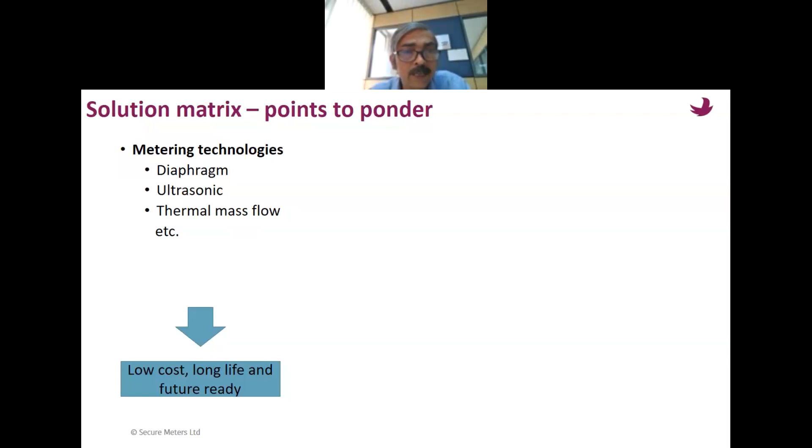So all this needs to be factored in by the CGDs when taking a decision. Again, this is not directly related with the standards part, communication technology. But somewhere or the other, there are various technologies. One needs to take a decision on what is my lowest recurring cost, and it is suited to the need. It should not happen that you specify I need LoRaWAN, or I need NB-IoT, or I need near field communication. You cannot randomly specify what communication should be there in the meter - it purely depends on the topography of the place.

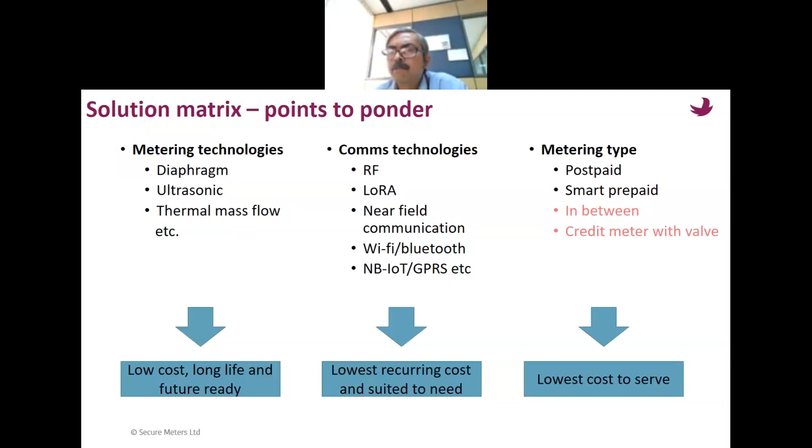So basically find out the topology and then decide about it. Metering type, of course - postpaid is a normal credit meter as defined as part of the regulation. Here, this is where we get into the regulation, and there are certain things which can be thought of.

Postpaid or credit meters were there. PNGRB has introduced smart prepaid, smart prepaid with communication. So that has been introduced. Can an in-between meter, maybe a prepaid without communication, be introduced? That is something which can be thought of, or maybe even a credit meter with a valve. This will help facilitate certain processes like manual disconnection, manual temporary disconnection. These are certain things which can probably be thought of. And remote disconnection, maybe credit meter with a valve with remote disconnection, with communication and remote disconnection, will basically serve the purpose.

This will cut down on certain costs where the CGD has actually to send manpower. These are certain things which can be thought of, and maybe some of them can get into the regulation part, the regulatory requirement. Overall, whichever CGD takes a decision on that, their requirement should be lowest cost to serve, and whatever is suited to their requirement for serving in the most cost effective manner is something they need to look at.

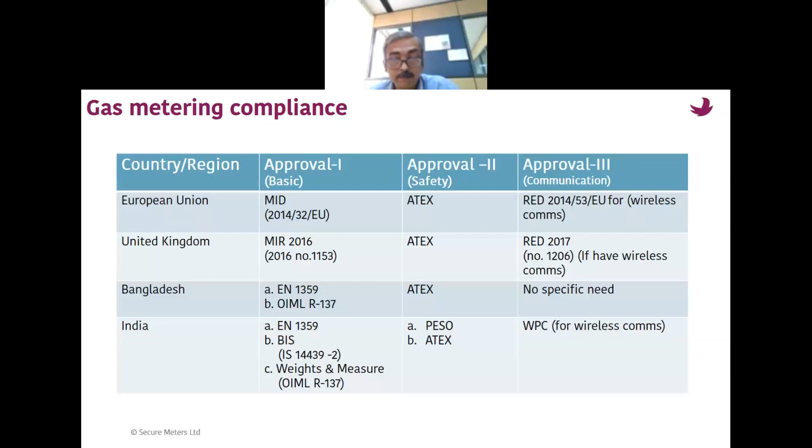Okay, thank you, I'm through with my presentation. That was short.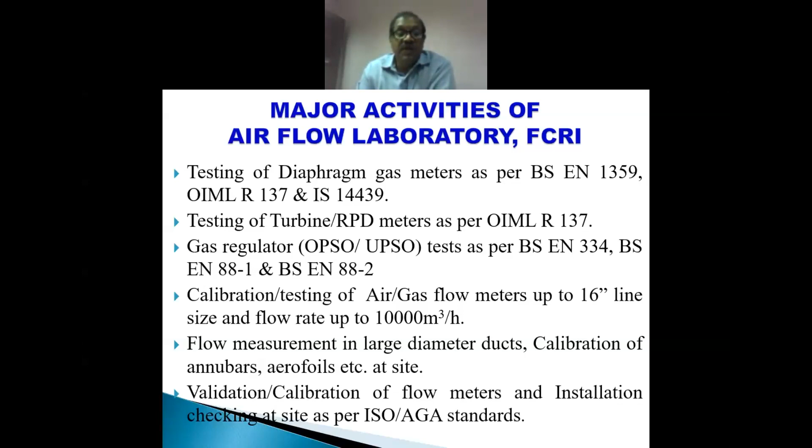So these are some of our areas of work.

Coming to domestic gas, we did the first model approval almost 20 years back. Unfortunately, the first few companies who took model approval from our end are not there in the field now.

Diaphragm gas meters start from G1.6 to G650. But as many of our experts told, in the present Indian condition, G1.6 and G2.5 are the most populated ranges. Earlier, G4 up to G25, G40 was also used in industry. But considering the accuracy the meter can serve, it's slightly inferior to some new technologies, and slowly some industries have shifted from diaphragm type meters to rotary type meters, considering better accuracy and higher operating pressure.

And why is a model or type approval necessary? That is, if any manufacturer produces a new meter, how do you give confidence that that particular model is capable of metering to national or international level accuracies, so that the government body can accept that manufacturer?

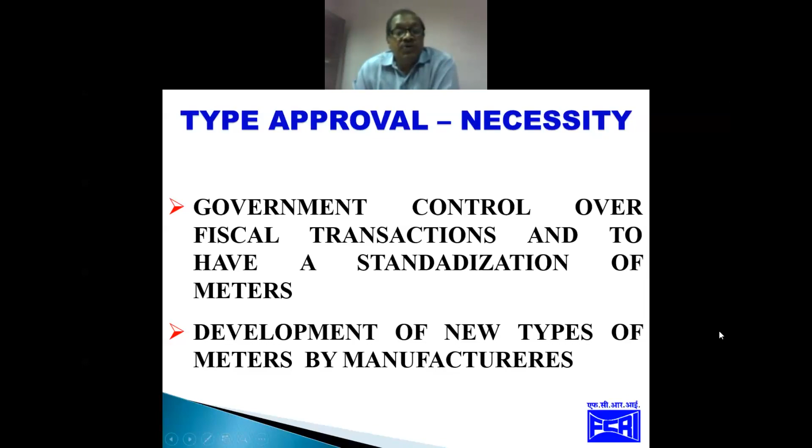Earlier, and presently also, we have IS standard 14439, which is under revision now, and OIML R137, and BS EN 1359. Out of these, OIML R137 is a general recommendation for all types of flow meters depending on different principles of operation. The IS standard is typically focused on diaphragm type meters, and EN 1359 also focuses on diaphragm type gas meters.

So if you compare the old Indian standard and the BS standard, the BS standard recommends many more tests which are more realistic to operating conditions than our Indian standard. Now I congratulate the BIS for adopting a revision to the standards, so that our standard is also at par with the international developed countries' standards.

So we are in the process of upgrading many of the standards, and we are happy that we could also take part in this aspect with EN 1359. It basically covers error of indication and many other tests described by other panelists earlier.

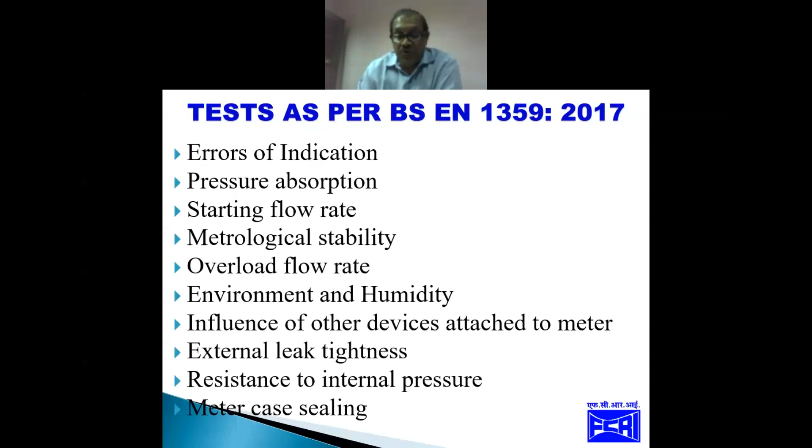The first model approval test we did, the first 2 or 3 model approval tests, were not based on Indian standard, but based on EN 1359 standard. At that time, manufacturers felt that following a developed, acceptable standard, which may be superior to the national standard, would help them cater to the future too. That was at least 18-20 years back.

After that, they withdrew from the market due to many reasons, and now many manufacturers are available in India. They import the whole unit directly, or import the components and assemble here. However, whatever the procedure, the product should be validated by an Indian agency. Apart from FCRI, there are a few more laboratories capable of doing these tests.

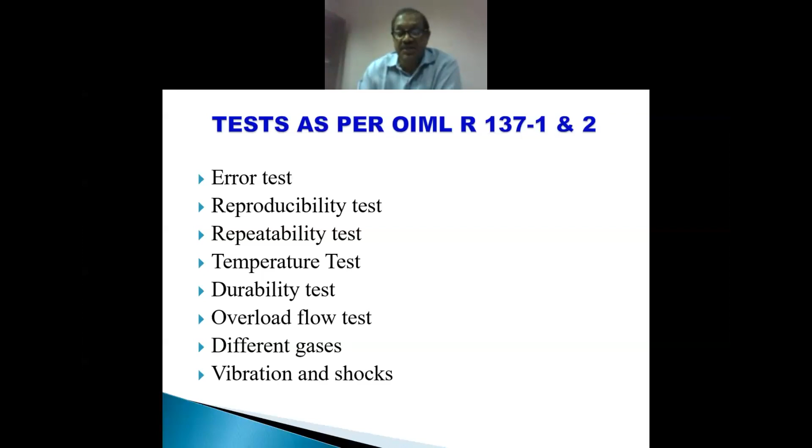These are some of the tests we do as per OIML R137. These are a few tests, and EN 1359, being exclusively the standard for diaphragm gas meters, covers many more tests. These are all tests earlier FCRI was serving. Of course, we don't claim that all tests recommended by the standard are covered by FCRI.

We focus on and cover most of the tests related to flow and related areas, and the remaining few tests for casing, metallurgy, and rubber and casing components, they have to depend on other laboratories to get certified, and then submit all the certificates together to the legal metrology for acceptance.

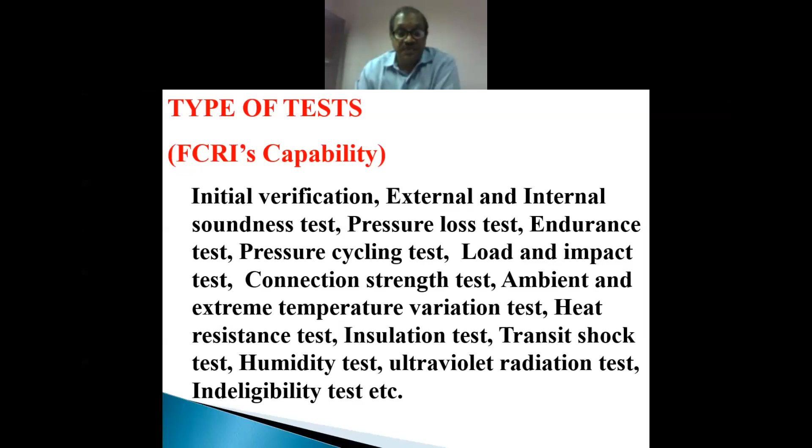The ambient temperature requirement as per the EN standard compares 4 temperatures - where the meters are kept for testing, the ambient temperature, the temperature of the fluid passing through the meter, and the temperature in the reference standard. From all these places, the temperature should be within 2 degrees centigrade, and variation in ambient condition over a period is 4 Kelvin per 12 hours and 2 Kelvin per hour.

But at present, FCRI is capable of maintaining the temperature within 0.5 degree centigrade throughout the test, considering the temperature at the meter, at the reference system, and where it is being stored.

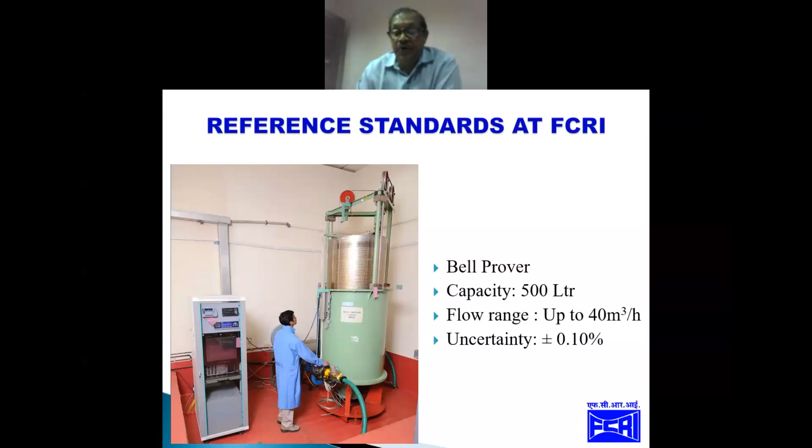Bellprover is one of the best reference standards, which is also covered by the EN standard. We have a Bellprover of 500 liter capacity, and now the claimed uncertainty is 0.1%. When it was supplied, it was 0.2%, and we improved the accuracy by changing the scale from mechanical to digital, along with a better calibration method for determining the volume.

For endurance tests and similar tests, we have a small test bench developed in FCRI itself. We can accommodate 10 meters in series. We can connect a Bellprover, or we can connect critical nozzles - different standards can be connected depending on the flow rate required, and we select accordingly. This is the test bench.

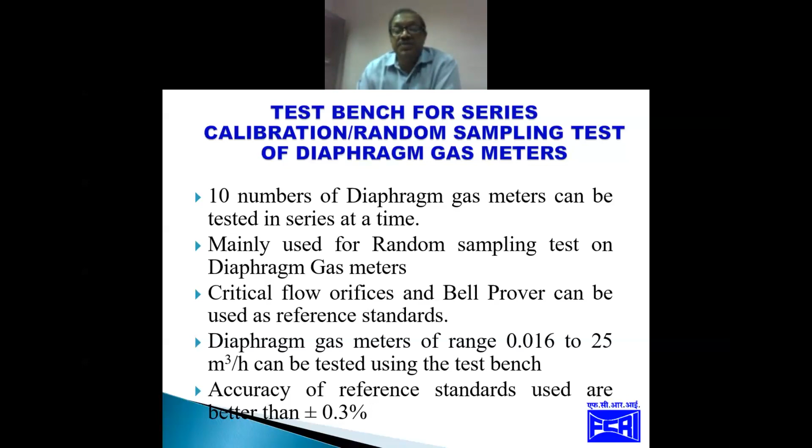For different types of tests, like spray systems and different climatics, we have climatic chambers where we can vary the temperature, humidity, etc., to generate different climatic conditions, and we do some of the tests using these chambers.

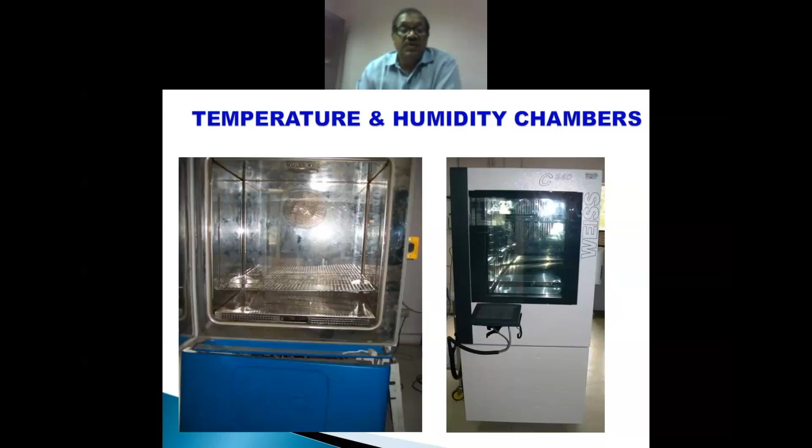This is very interesting for the manufacturer or developers, how it can vary, and it will help to select the material of the diaphragm and other hinges and other counters.

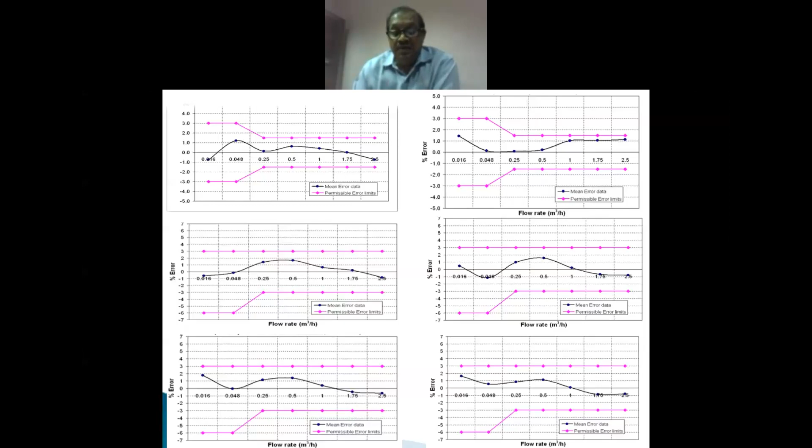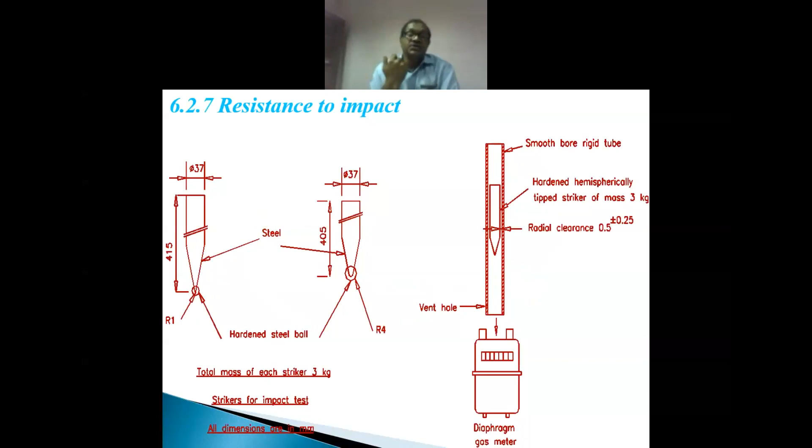And then we do the torque test. So these are all relatively simple tests. We can have the torque test and bending moment test, resistance to impact. These are all the things we developed in the beginning.

Because we were also very new to this requirement, and all of a sudden if someone approached FCRI that we want to have a model approval, that in our country implementation of standardization has been started. Earlier it was imported, and then our CGD, the pioneers in that field, deployed the meters. Over a period of time our nation wanted tested and validated flow meters, and when they approached, it was defined, everything was developed within our knowledge of what is to be done.

So every time it is a new challenge for us to devise it and then test it. One of the manufacturers who was not there in the present, from the impact test, failed 2 times, and this 3rd time he could pass that particular test. So that time it was really interesting, and many people asked me why that test is so important.

After doing the test, initially the manufacturer also could not believe it, since he was also following some international standard, but due to the type of material he had used, his product failed 2 times in that particular test. Only the 3rd time could he succeed, by changing the materials.

So this shows how important a standard is, and the test criteria also, for our manufacturers, users, and law-making agencies, in how to make a particular law a standard, how the manufacturer deals with the standard, and what an end user expects from a standard.